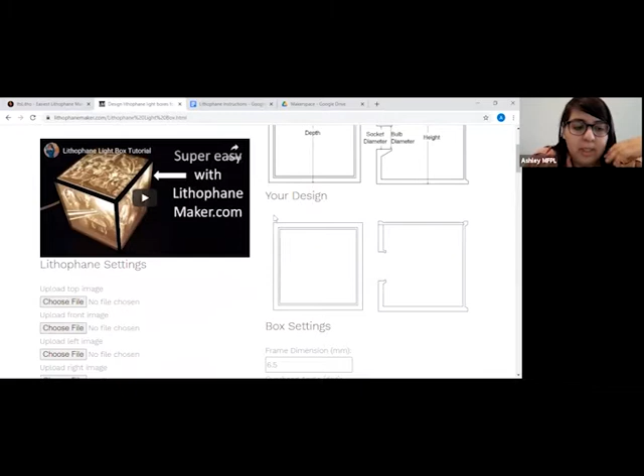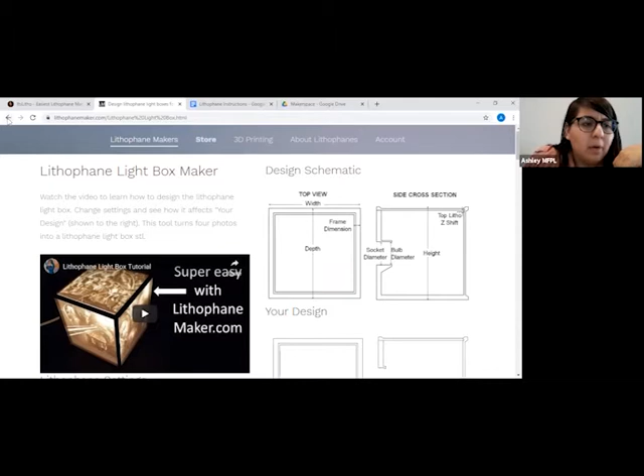Lithophane makers, this one's a very popular one as well. They have a lot of neat designs you can make, like a lamp holder, hearts, a light box. But this takes a deeper understanding of lithophanes. You can't really see what you're doing as you do it, you just kind of upload your files and tell it what to do. So this one is great, but I would hold off on it until you understand a little bit more about lithophanes.

And this is the one we'll be using. It's called ItsLitho, and you pretty much just go to the site and click Get Started. You have the option of signing up and creating a profile. You don't need to, but you can. It's only best if you want to go back and make a lot of different projects and edit them at a later time.

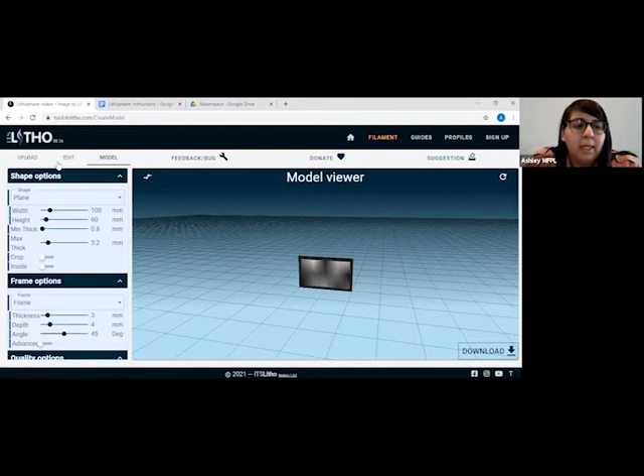All right, so the first step is we need to upload an image. You go up here to the tabs and click upload, then you have to click the upload button again, this blue one, to get your image. We're going to start off with one picture. You can see it as it uploads.

And then you go to edit mode. It automatically grayscales it for you because that's how it's going to print. Luminance is the most common one used for making lithophanes. They have other options, but Luminance is pretty much the best option.

So my nieces and nephews, I have like 12 of them.

So this right here, these red, green, blue, intensity, those are just options for you to edit your photos. The one thing I want to remind everybody about lithophanes is you want a good contrast between dark spaces and the lighter spaces, because the white spaces are where the light shines through on your lithophane, and the dark spaces are what's going to be illuminated and what's going to show. I'll show you more about what that means when we get to the model.

So here on your image editor, you can mess with your contrast, your brightness. There's no right or wrong way to do it, you kind of just eyeball it and see what kind of looks best.

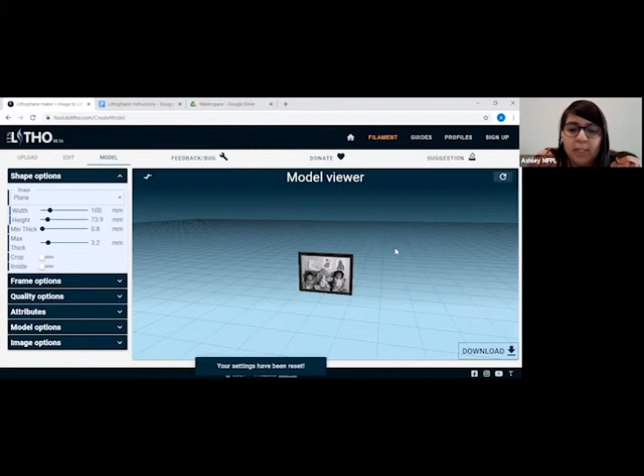Okay, before we get started, I just want to point out this circle arrow right here, it's kind of like a reset. See where it says your settings have been reset? If you don't like what you're doing, if you mess up, you can click this up here. The only thing is, it's going to reset everything, so be very careful. And these arrows right here just kind of flip how you see the screen.

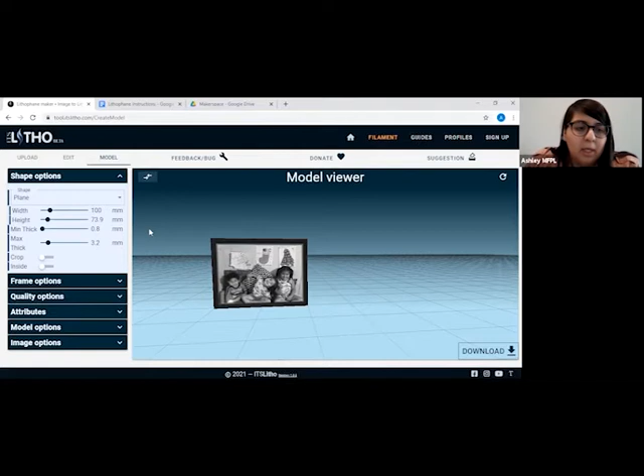So there are different shape options for a lithophane. For most of this tutorial, I'll be just doing a basic one, Plane, but I'll circle through them real quick.

You have the option for a cylinder. It creates a little cylinder for you to see all the pictures, well, for the single picture. And that's how it prints.

We have a sphere. I've never printed the sphere, so I'm not sure how well it looks printed, but it's a pretty neat option.

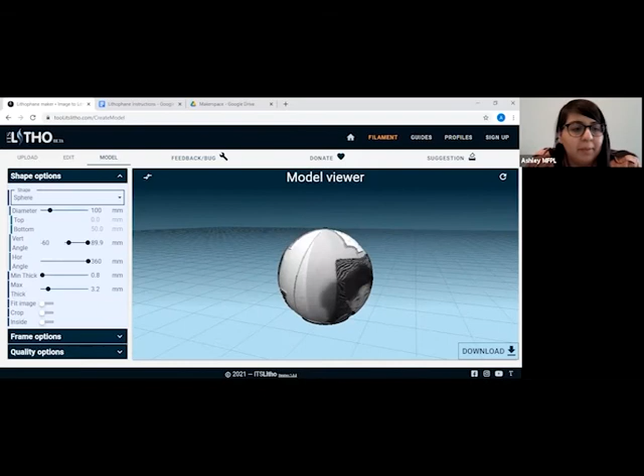You have the arc, or kind of arc, where it just kind of curves your picture. It makes it easier to stand.

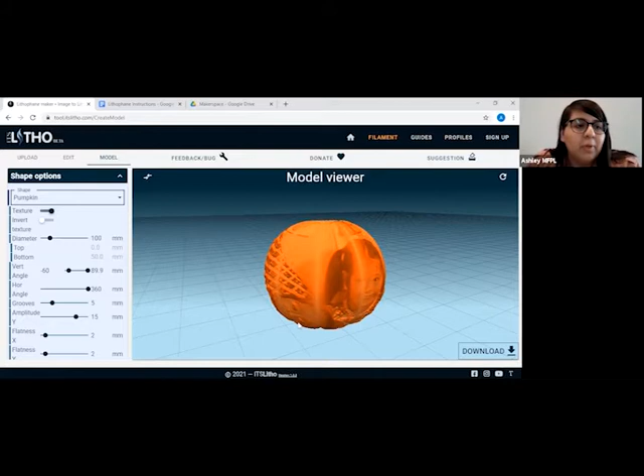Pumpkin - they have these really neat holiday themed ones. That's what I really like about this tool too, like they're updating it, and they do holiday themed ones. Here's the pumpkin, and they have a Christmas one and a heart, which I'll show you in a second. This revolve one, they have different options, and it's like a vase pretty much.

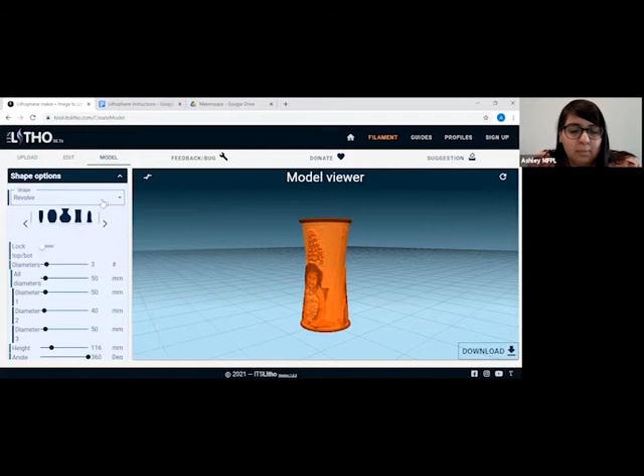Change it, see? And we have a circle. Christmas one, a little star, and a heart.

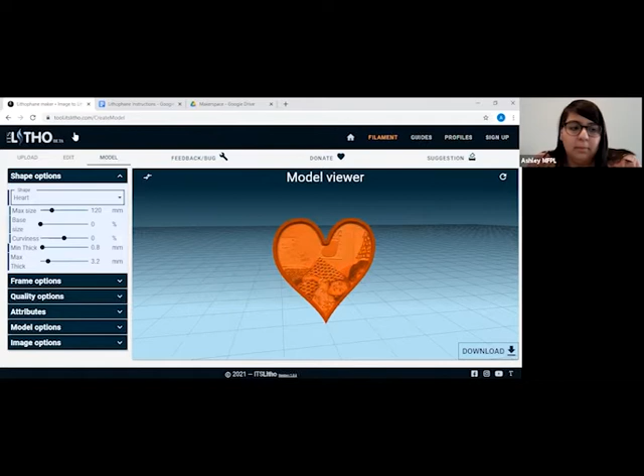So I'm gonna go back to plane, set it real quick. Whenever you click the pumpkin option, it turns it orange and keeps it orange. I'm not sure why it does that - it's something with the generator itself, but it really doesn't change anything.

Okay, so here in the model viewer, it shows you your lithophane, and it shows you how it looks when it's backlit. So imagine there's a light behind it, and that's how it appears.

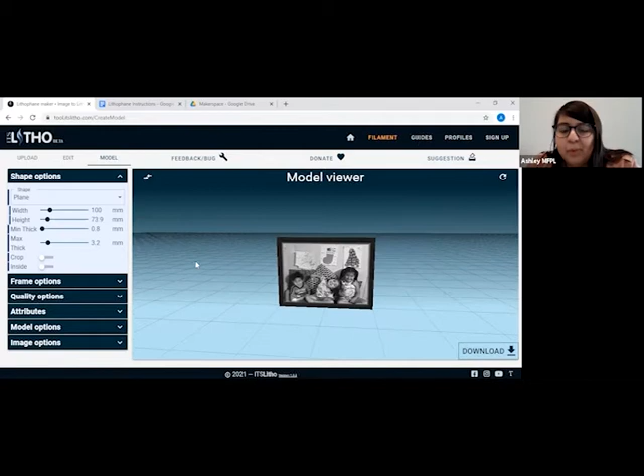You have the options to mess with the width or the height. You really don't need to mess with those settings too much, because in the slicer, you'll be able to change how big you print it. And this will just make your file bigger, and it may make it too big to download.

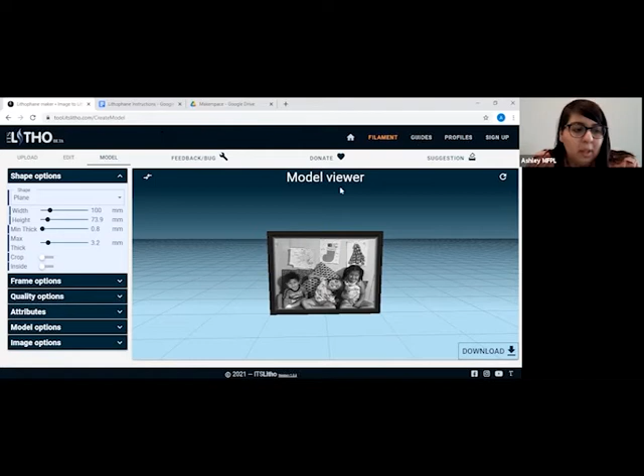And like I said, you really don't need to mess with these too much, unless you decide either you want to crop it or crop inside.

I will say this though about minimum thickness. For the most part, y'all can leave it as it is, but this is where it also gets a little bit more complicated, because minimum thickness also relates to your 3D printer and your 3D printer's nozzle.

I'm gonna show you something real quick - let me stop sharing for just a second. So a 3D printer, it prints plastic, and it prints it through a nozzle. This is just an example of filament, and it's plastic that we use here at the library. What it does is it takes that plastic and melts it through a little nozzle to print.

Nozzle sizes vary from the standard size - especially the one that we use here at the library, which is a 0.4 millimeter size. And for minimum thickness, you change it to 0.2 plus your nozzle size. It gets a little complicated there, and it can be a bit much, but if you leave it at the recommended settings, it won't affect it too much. For a better print quality though, we should change the minimum thickness to 0.6.

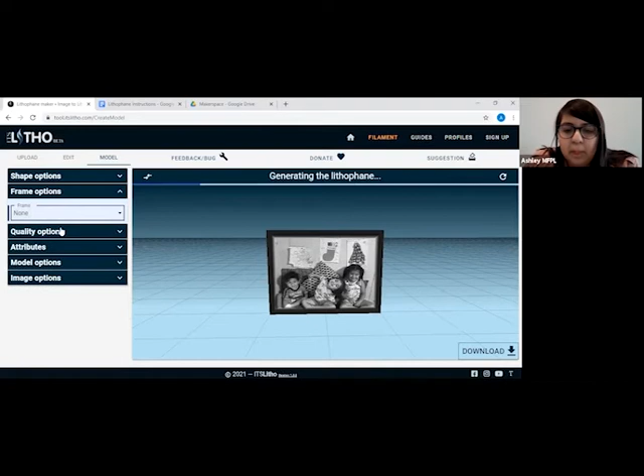Okay, so here on frame options, you have the option of giving it a frame, because right now you see it has a frame on there, and this is it without it. It prints much better when you have a frame or a border - it kind of gives it a couple of extra layers to prepare itself to print.

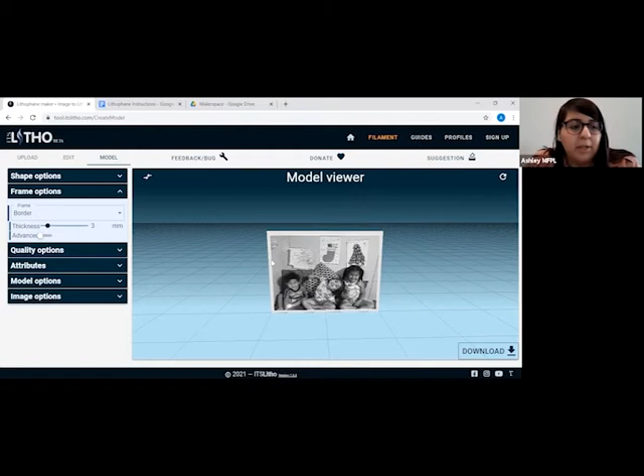Lithophanes are very particular because they have to be printed very precisely, since there's a lot of detail in them. I like to print mine with the frame - it makes it look more like a picture. And here you can just adjust the thickness, the depth of the frame. All this just affects your frame right here, and you can adjust it as you see fit.

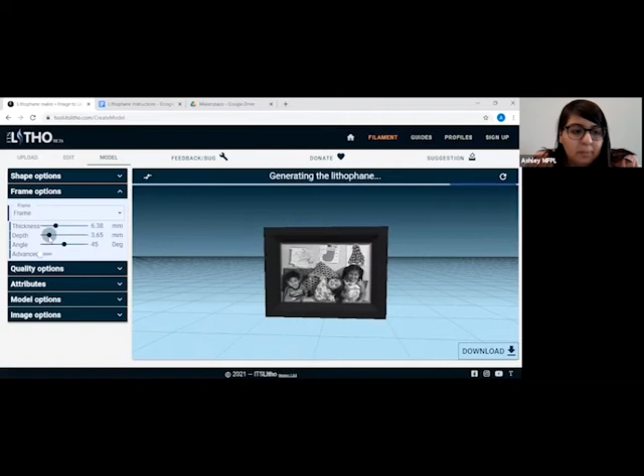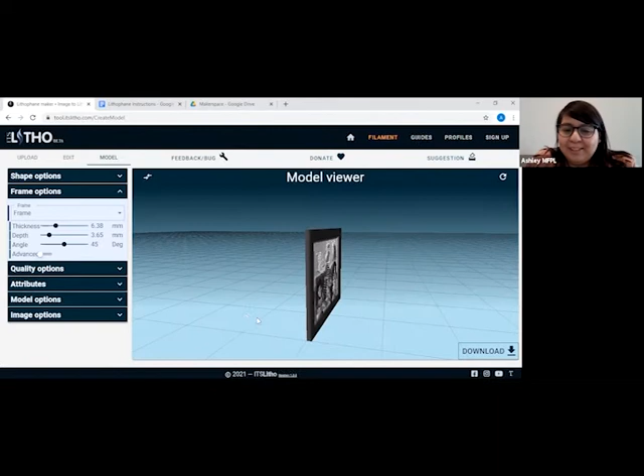Ashley, do you still have the examples that you've already printed? I know they didn't show very well the other day, but maybe with the lighting you have now, it would show up better. Yeah, unfortunately I left those at home. I took them all home and forgot to bring them today. Sorry, but yeah, they weren't showing very well through the camera the other day.

All right, so that's frame options. Right here is quality options. This shows you how big your file size is, and you have the option to adjust it.

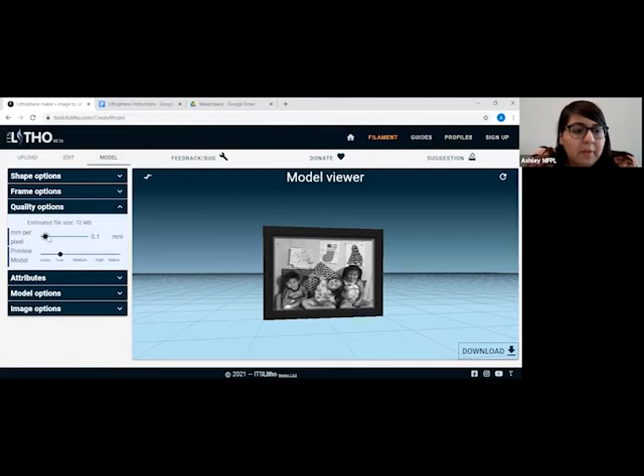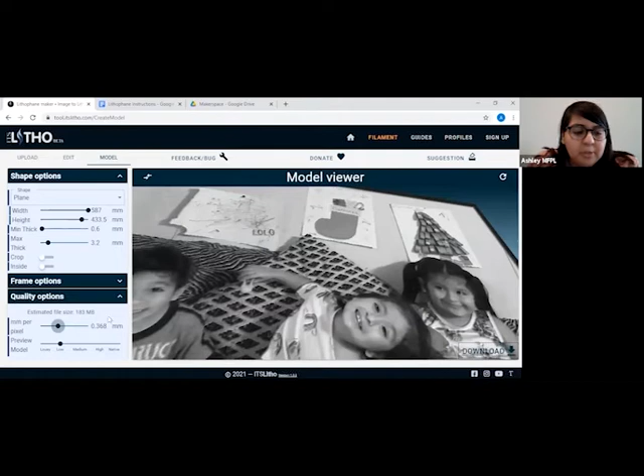Like if you end up creating a file that's too big - here in shape options, I'm gonna go super big and see, it's 2,476, and that's way too big, because if I try and download it, it even warns me it's gonna crash the tool. So right here, I can mess with the pixels and make it smaller. You lose out on some resolution that way, but it's nice to have that option to fix it.

Okay, I'm gonna go ahead and reset it because I'm fine with the way it looks right here. This preview model affects your model viewer - it doesn't affect your lithophane.

Here, I'm gonna show you - if I go to high, it's gonna show more detail on how the lithophane looks, but it's gonna make your program run slower, and it takes longer to respond and download. So you can usually leave it on low, and it's usually not too much of a problem. I guess you only want to look at high when you want to see more clearly how your lithophane is looking.

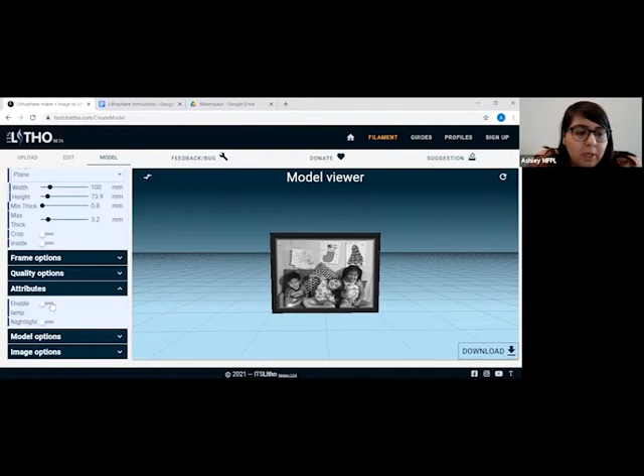Right here we have attributes, which enables you to make it like a nightlight or a lamp. Let me show you. So right here, this is the back of the lithophane, and it's really neat that they added this feature where you can create an added piece, so you can specifically include a light in the back of it.

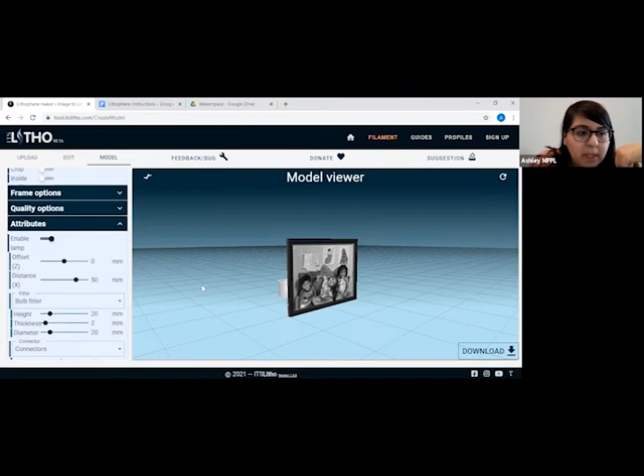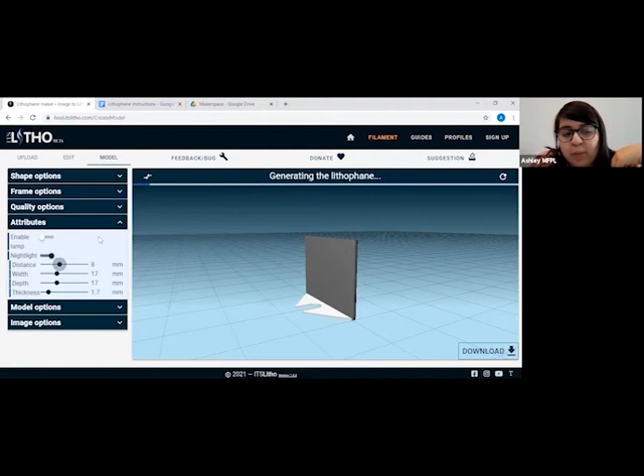So that's the lamp feature, and there's another one, the nightlight. It just kind of creates that little effect, and you can mess with it right here like that. If you know exactly the measurements of the light you have, it makes it kind of easier to mess with these parts, the distance, depth, and thickness.

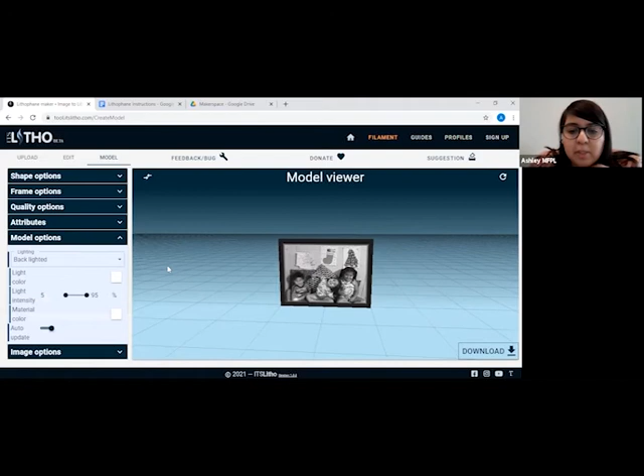All right, I'm gonna go ahead and turn those off now. Right here, model options. This model viewer is showing me how the lithophane looks when it's backlit, like if there's a light behind it, and we can see it with no light. And this is how the lithophane looks when it's actually going to be 3D printed. So if you decide to send the file, this is what it's going to look like.

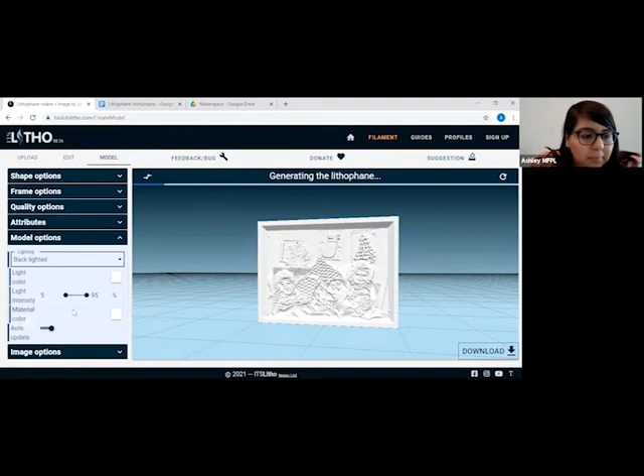You really don't need to mess with any of these other model options. Right here, image options, it's a positive image. If you turn it off, it becomes a negative, kind of like an actual photo, like the negative image of a photo.

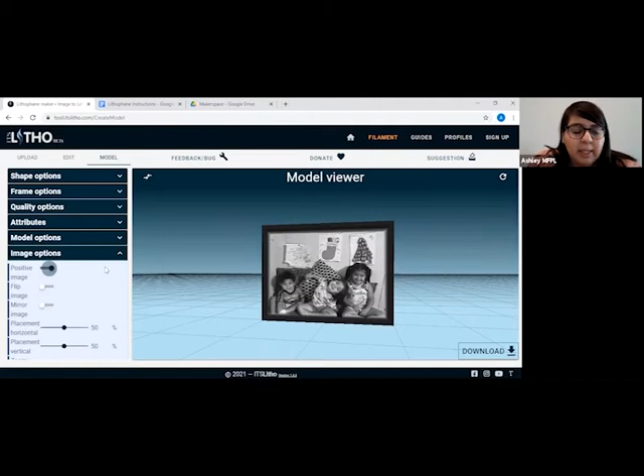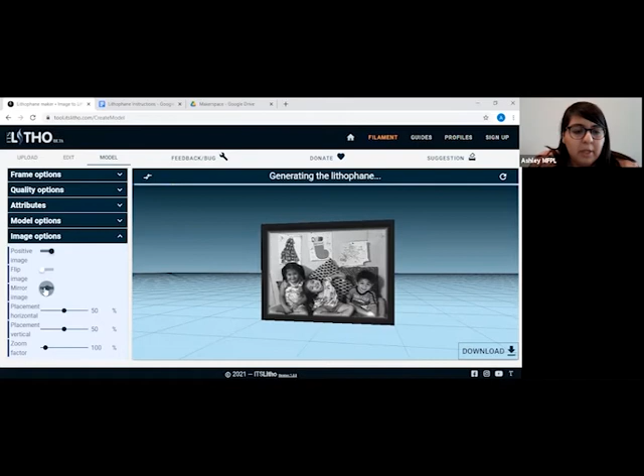And this is your edit tab, where it allows you to edit your picture right here, like flipping the picture. This part is really handy if you decide to use a different shape, like the heart or the star, because you can go in and move things around. Let me show y'all.

So I'm gonna switch to the hearts. Right here with the heart, you can't see any of the kids, so I would adjust these settings. See, it's moving the picture inside the heart. And that's usually what this section is good for.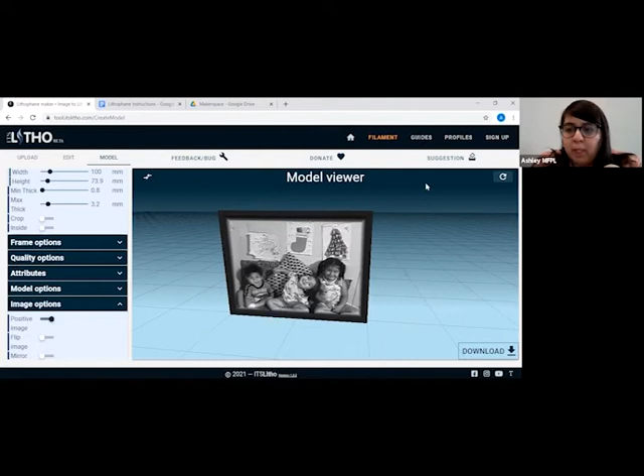Is that it? Like I said, if you want to do just a regular picture, you really don't need to change much. And once you have it the way you want it, you can go over here to the right side. There's a big download button, and you just click it. It takes a few moments to download your lithophane, especially if you make any major changes to it.

Sorry. And you have a few options. The lithophane plus the attribute, that's downloading the lithophane and the nightlight option, and that's going to make sure the model stays together. You can just download the lithophane, or you can just download the attribute, the nightlight part.

There is a way to make color lithophanes. This is a new option that they've included, and it's a little bit different. Right now, we're just focusing on basic lithophane, so I'm going to click the lithophane right here. You just click on the one you want, and it downloads it.

As you see right here at the bottom of my screen, it shows me it's downloaded. If you're not sure where it ends up, you should have a downloads folder, and that's where it should be. It always calls itself 'Litho', whatever the name of your image is.

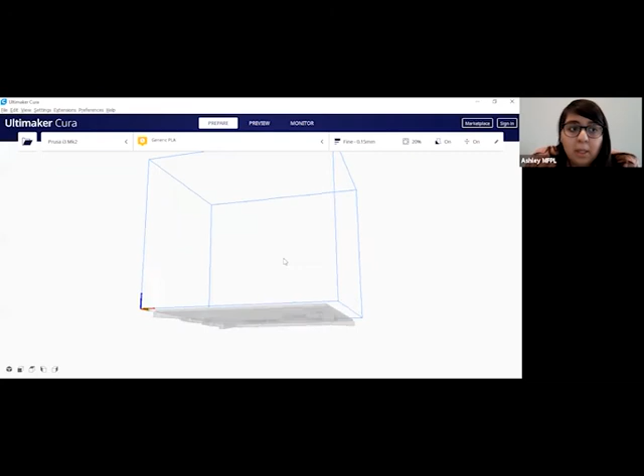And I know you guys aren't going to be messing with this part, but I want to show you what a slicer is. Make sure it's sharing. Okay, so this one's called Cura. It's a very popular 3D model slicer. I'm gonna open my file.

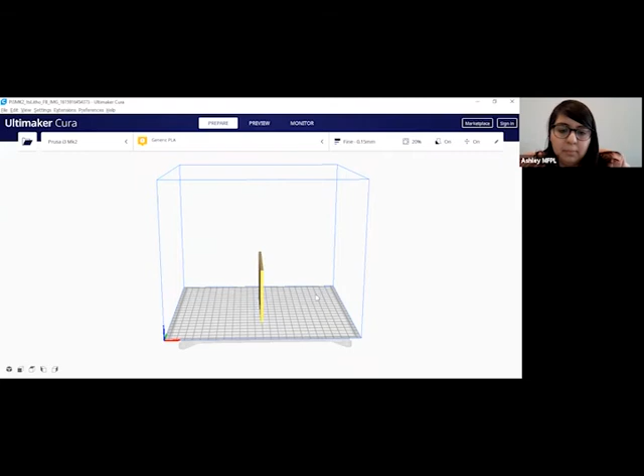I have a couple examples here. And it just shows you your image, how it's going to appear. This large box is your print bed, and it's where your 3D printer is going to print on.

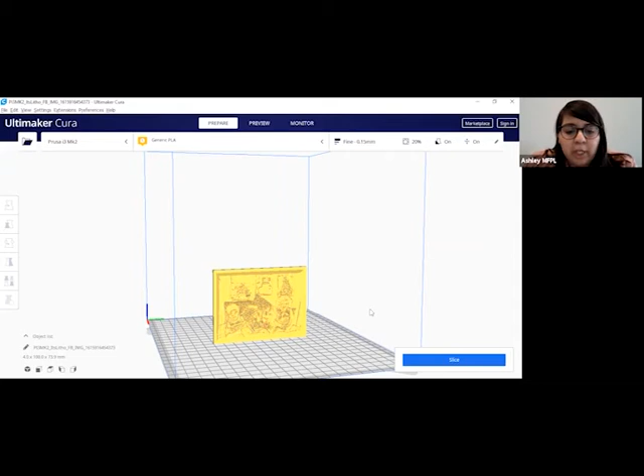You always want to print lithophane standing up. It takes longer, but that's how you ensure you get all those details of the photo. If you print it laying down, you're going to lose all that detail. Hopefully in the future, when the makerspace reopens, y'all will be able to come in and slice files yourselves.

Lithophanes are always printed very finely. So what layer height means is how big or thick the layer is going to be when you print. 0.1 is a good standard for it.

The infill is going to be like 99%. What that means is how infill is kind of like how heavy your print is going to be. Earlier it was on 20, that's lighter, I'm not using as much filament. At 99% or 100%, it means it's totally filled with the filament.

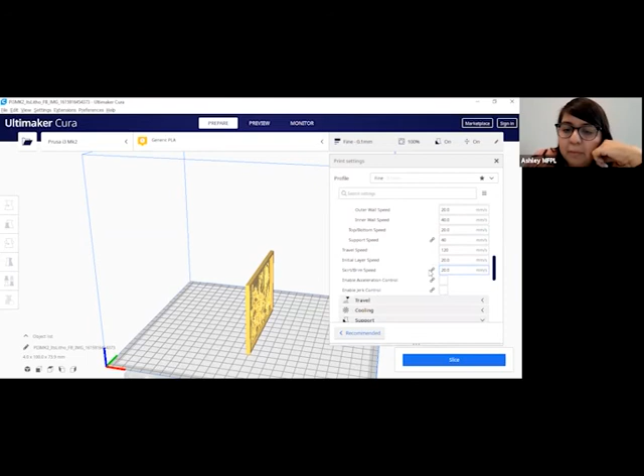And speed, you always want to slow down your printer when you're printing a lithophane, just because of all the detail they have. This one needs no support.

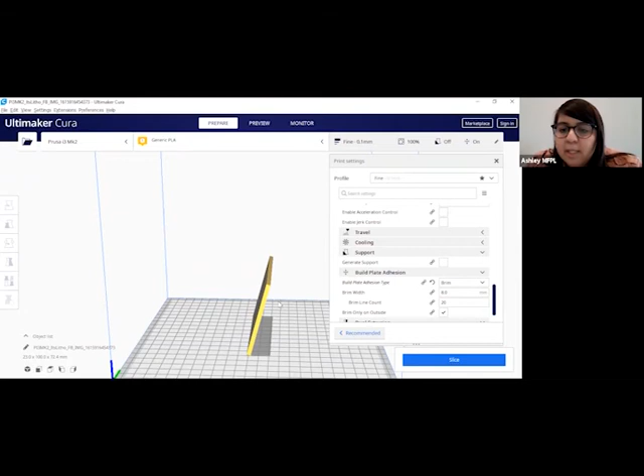What support means, if there's an overhang, like here, let me rotate this one. Okay, so this is rotated. So right here, it's kind of in the air. It needs something to support it when it's printing like that. The support will create like some kind of stand right here to help it stand up. And a brim creates another layer at the bottom of your print just to help it stand up.

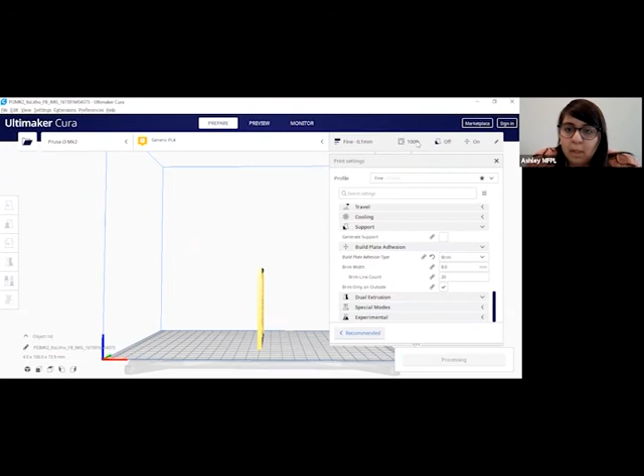Right, and these things do take quite a bit to print as well, the detail and how slow it is, because I'm slowing it down and we're using so much filament. This one's not too big, but right here in this corner, it's gonna take 7 hours to print.

All right, does anybody have any questions so far? Because I'm gonna go back to the lithophane generator and show you how to do more than one picture at a time. But if everybody doesn't have any questions so far, I'll go back to it.

I don't have any questions about this, but is there a limit to the number of lithophane documents we can send you to be printed? I'm not gonna get out of control, but I'm just wondering, I know I've sent 2 so far. Did you get both of those? Yes, I got both of those.

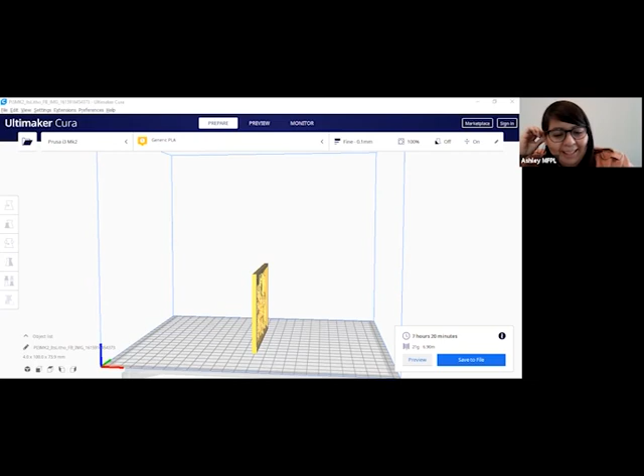Okay. Because the reason I asked that question is, on one of them it showed that in order to print, it was gonna cost over $100. Oh man, yeah. So I was like, oh my gosh, that's what it costs for the library to print it? No, that's not what it, okay, no. Right now we're not charging for 3D prints.

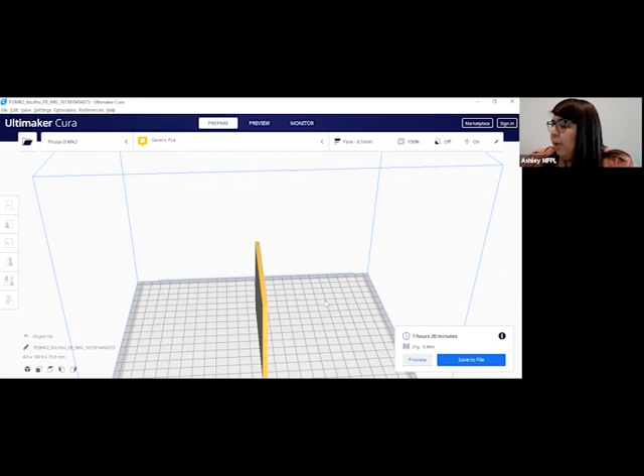If you bring in your own filament, we'll print what you want for you here at the library. This roll of filament costs like $20, and this is a lot too, like you get a lot out of it. But we're not really charging for prints right now, just because we're not doing cash flow right now. But since you came to both classes, I'd be willing to do another one for you, Celeste.

Okay, anybody have any other questions? Okay, so I'm gonna go back to my uploads. I'm gonna delete this picture, go back to my uploads, or click upload again so I get my pictures.

I've been listening to the Harry Potter books on audio, so I'm kind of obsessed with it right now. So I'm gonna do the Harry Potter book covers. See the order I'm putting them in, that's the order they're going to appear on your model viewer.

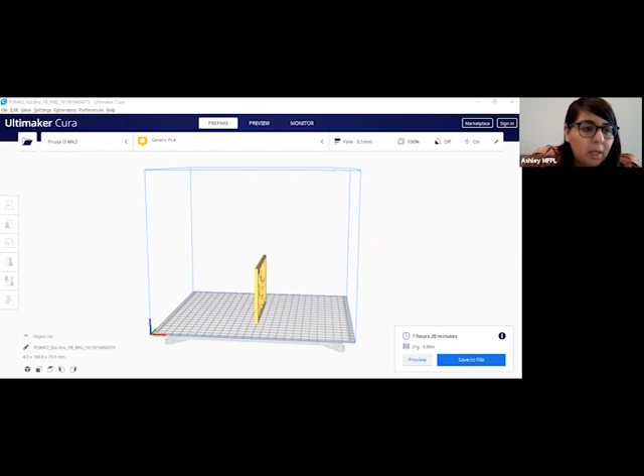So if you want something, just— Ashley, you still on the slicer on the— Cura? Oh, it's still on the, okay. Yeah, okay, oh okay, I see it. Okay. Can everybody see it now?

The lithophane. Do y'all see the lithophane where I have the 3 pictures of your Harry Potter covers? Yes. Yep, okay.

So the order you put them in here, that's the way they're gonna appear on the model viewer. You can't really move them by hand. You would have to delete them and upload them again to move them in the order you want. All right, so I'm just gonna do the first 4.

Again here, I'm not really gonna mess with the edits too much. Like I mentioned before, you really don't need to do a lot in this part. You may just want to make them a bit darker, but that's pretty much it.

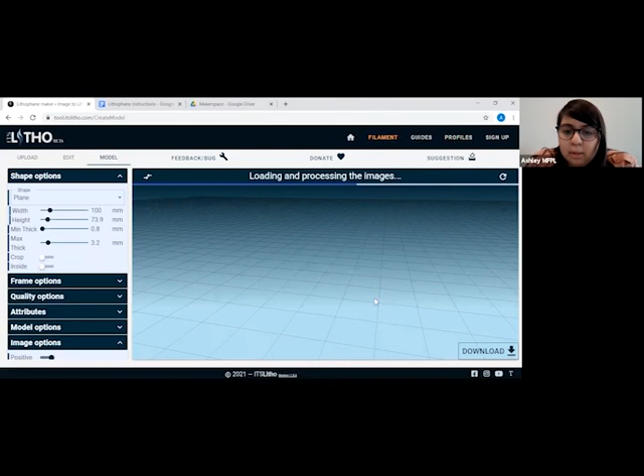Loading here. Okay, you see it right here on my model viewer. On the plane, it automatically sets it in the order for you, 1, 2, 3, 4. You can't change the order of it.

I really like the multiple photos, especially with a cylinder option. They look pretty neat. Oh, that does look neat. Yeah.

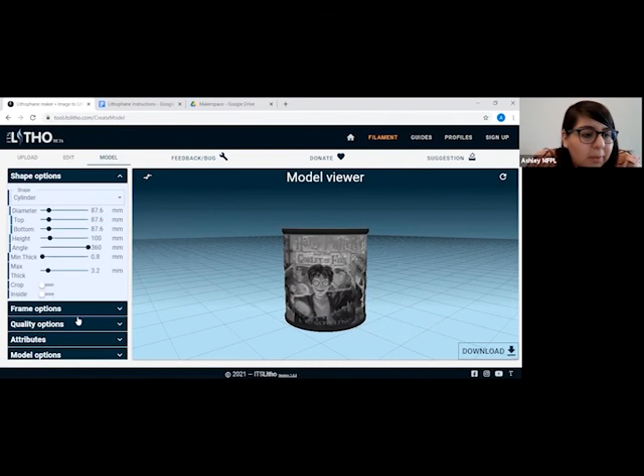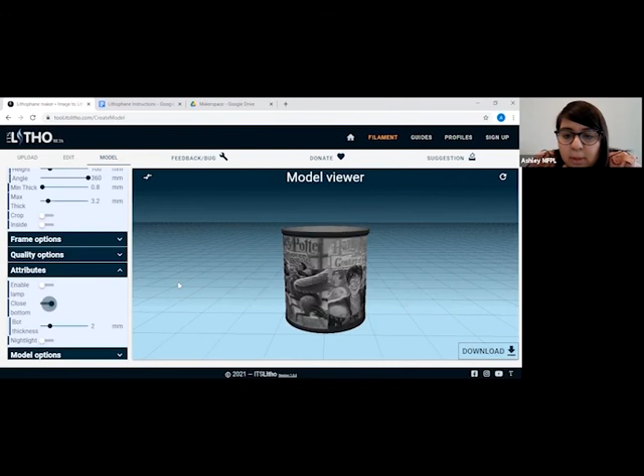And here with the cylinder options, there's a little bit different ways you can edit it. You can actually close the bottom, which makes it easier to stick a light in there, but it has to be a battery operated light, and put one of those battery operated tea lights in there.

Yes, pretty much, which these are really neat for those little night lights. You have the option to enable a lamp again, you can see that right there in the bottom. It's neat.

I'm not really going to mess with it further, and once I'm done with that, you can just pretty much download it again. And that's pretty much it with the lithophanes. With these lithophane tools, they make it so much easier now to create them. Before, people used to have to use Photoshop, and that takes a long time. And Photoshop's not exactly an easy program to learn either.